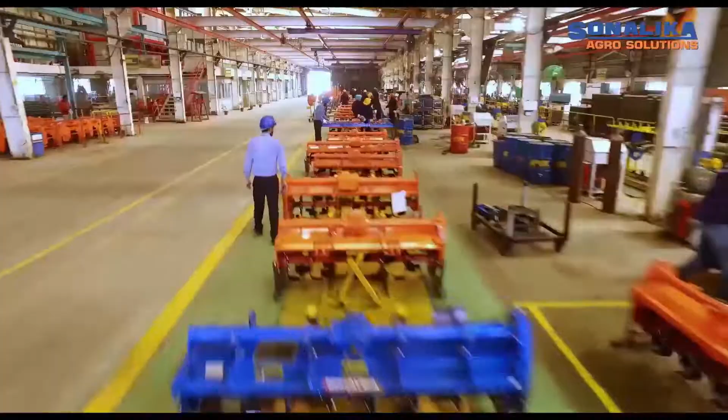With humble beginnings in 1969 as a manufacturer of farm equipment, Sonalika Group has grown into a leading international tractor manufacturing and farm mechanization company. Setting new benchmarks in quality, it is one of the fastest growing companies in the sector, with thorough focus on customer satisfaction and by aligning itself to the changing requirements of the farmers.

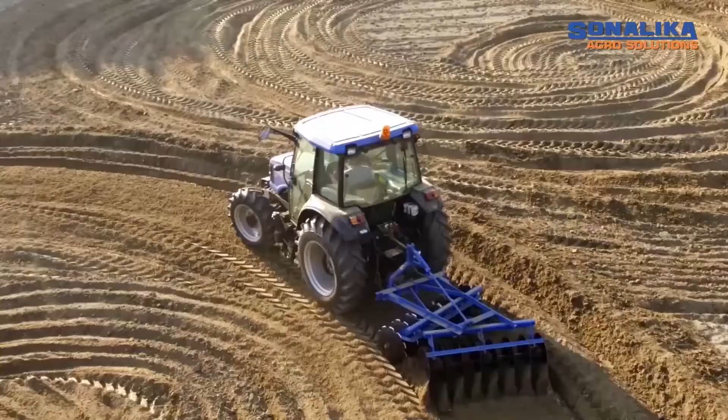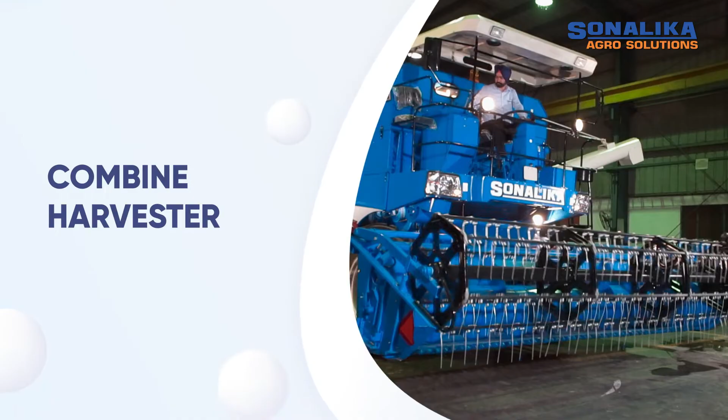Sonalika Group has always excelled in delivering high-quality, innovative products at competitive price. Staying true to its vision, Sonalika Agro Solutions proudly presents the Sonalika Harvester. In this installation video, we will share with you the process of installation and usage of the harvester and all that you need to know to get the best output from it.

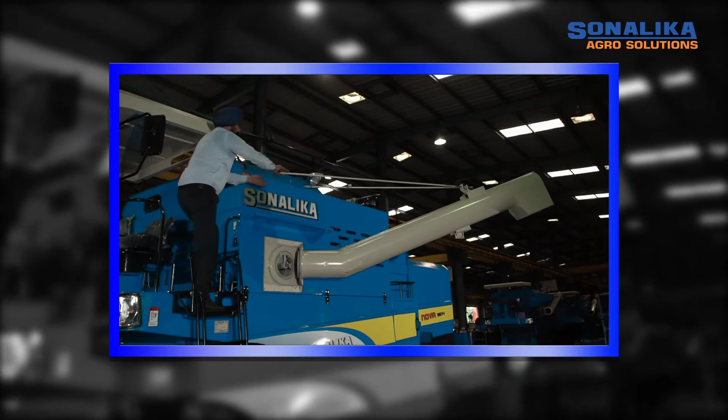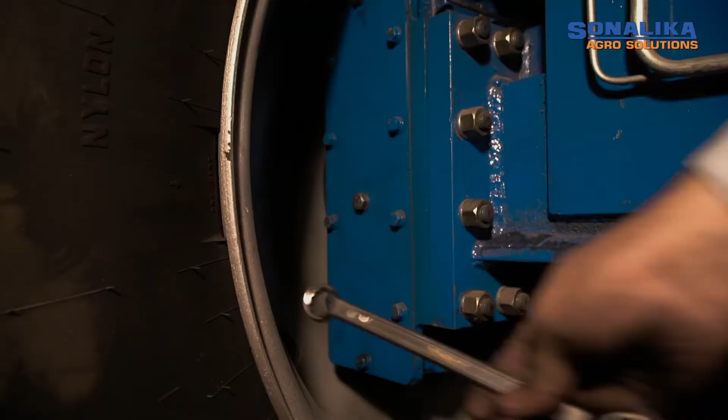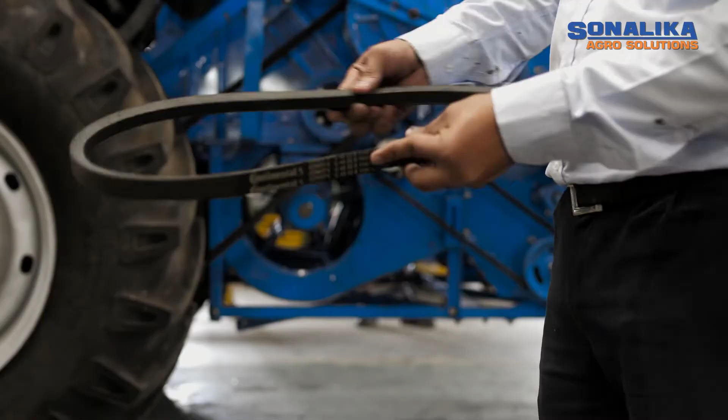Before operating the harvester, ensure and check following aspects. All nuts and bolts are properly tightened. V-belts need to be in proper tension. Adjust if required or replace if worn out. Before operating the harvester, all the bearings and greasing points should be greased every day.

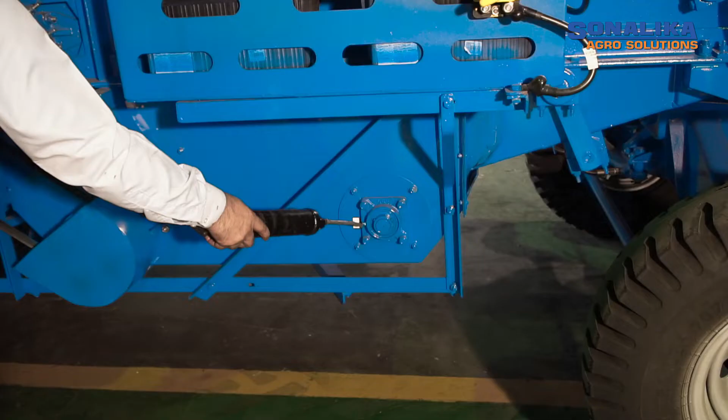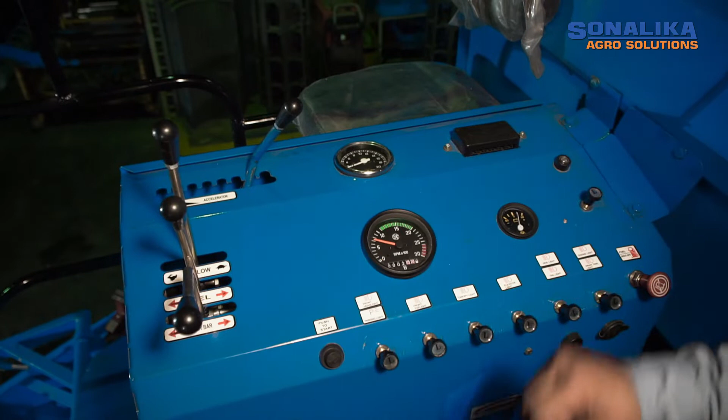Clean the radiator fins with the help of air or cloth, as a choked radiator will lead to overheating. Check the radiator coolant level and top up with clean water if required. Check the indication of ammeter for proper charging of battery. Check the transmission oil level of reductions unit, gearbox as per mark on dipstick and oil level hole.

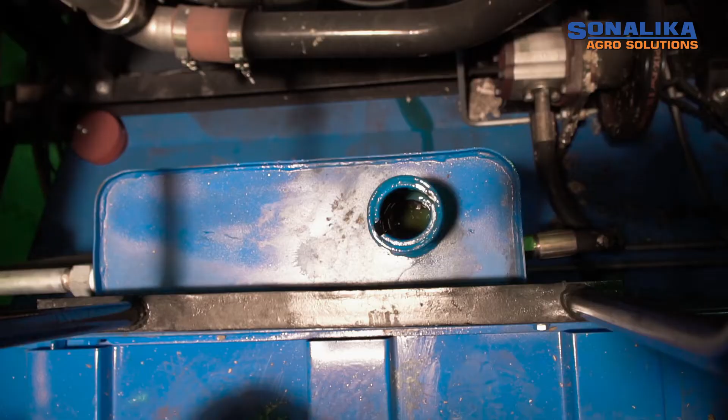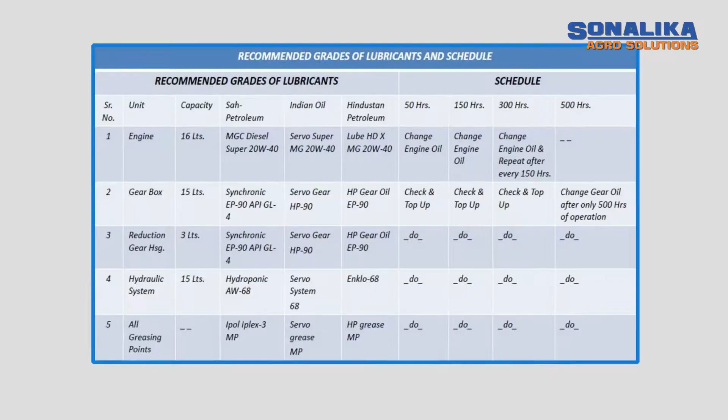Check the hydraulic oil AW68 level as per the level strip. Check the engine oil level as per mark on dipstick. Engine oil level must not go below the minimum mark. Top up with the recommended grade of oil if required. Clean the air cleaner with air after every 10 hours of operation.

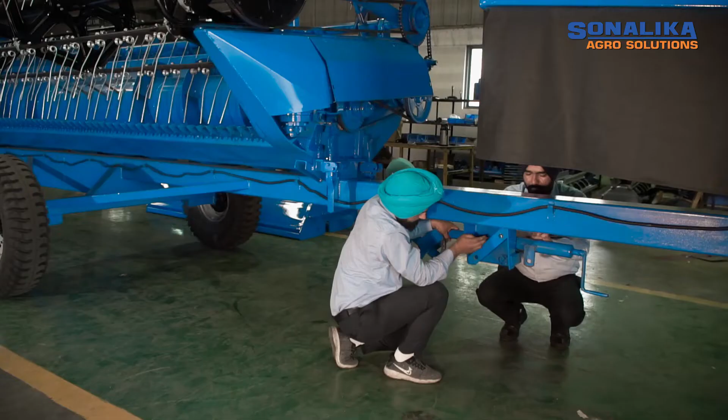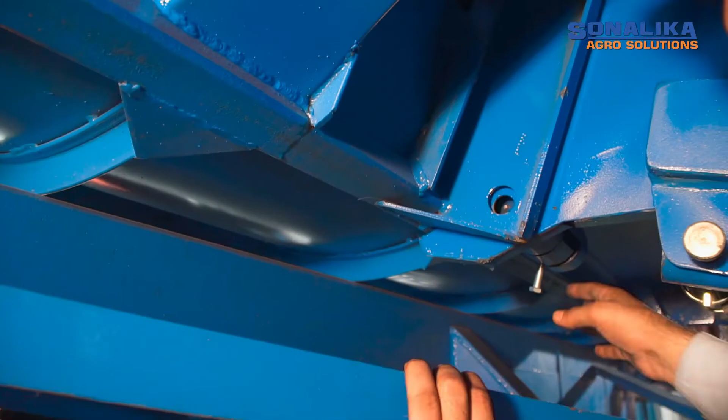Cutter bar mounting. Dismantle the cutter bar from the rear side and place it in front of the harvester. Align the harvester in line with the position of cutter bar. Move the harvester steadily to lock the cutter bar with harvester and lock it with the lock-in pin.

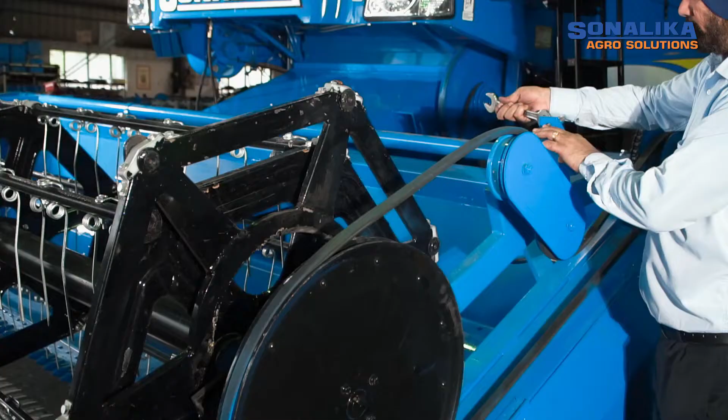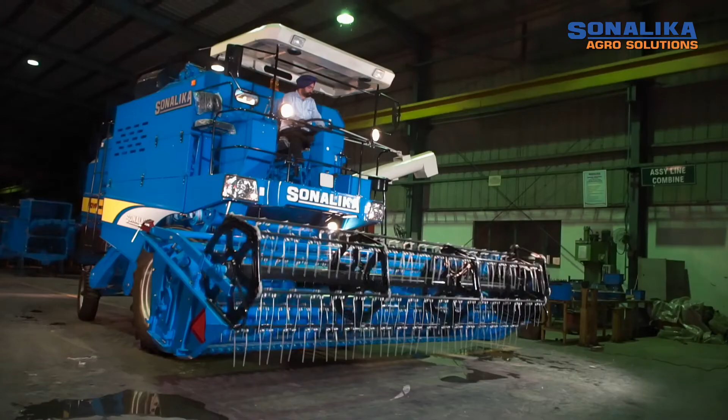Adjust all reel tines vertically facing to the ground for all standing crops and position the reel tines backward for badly lodged crops. The reel tine adjustment can be done by moving the cam roller mounting angle. Move the angle to the left for positioning reel tines backward and vice versa. Complete reel set can also be positioned forward or backward, up or down according to the crop requirement.

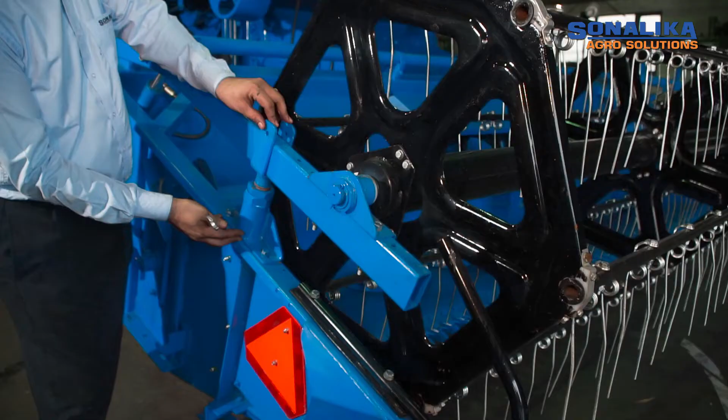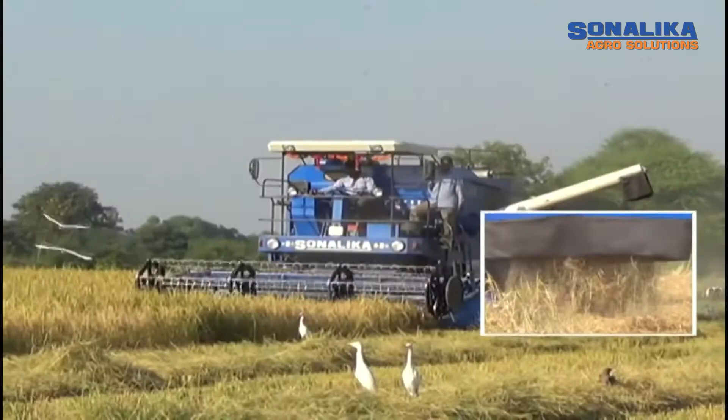Slacken the reel drive V-belt and unlock the bolt from either side of the reel. For badly lodged crops, move the reel forward, and for normal crops, the center of the reel should be vertical over the cutter bar.

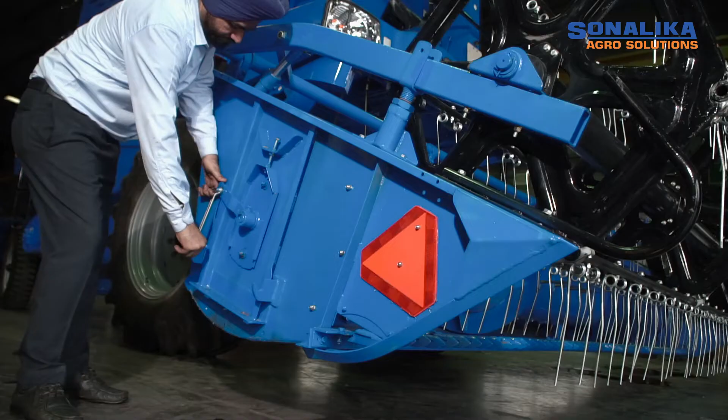Feeding of the crop to the feeder housing is important for the seamless working of the harvester. Maintain the gap between the front auger and the cutter bar tray 8 to 10 mm to avoid clogging of crops. Also adjust the prongs that help to bring the crop into the center of the feeder housing.

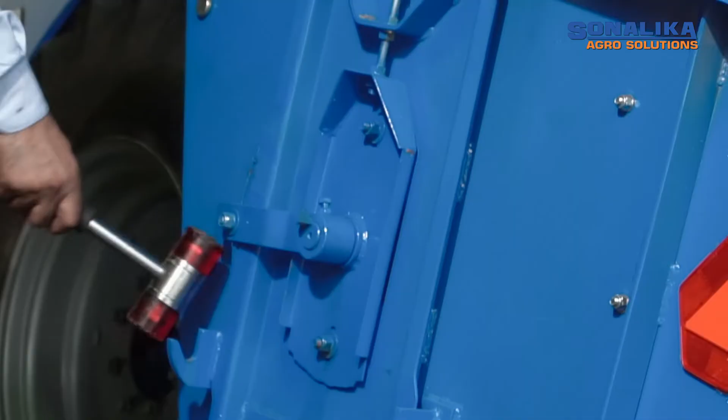Prongs can be adjusted by loosening the bolt and repositioning the lever. When harvesting bulky crops, move the lever downwards, and in case of short-strawed crops, move the lever upward. Position the lever in the center for harvesting normal crops.

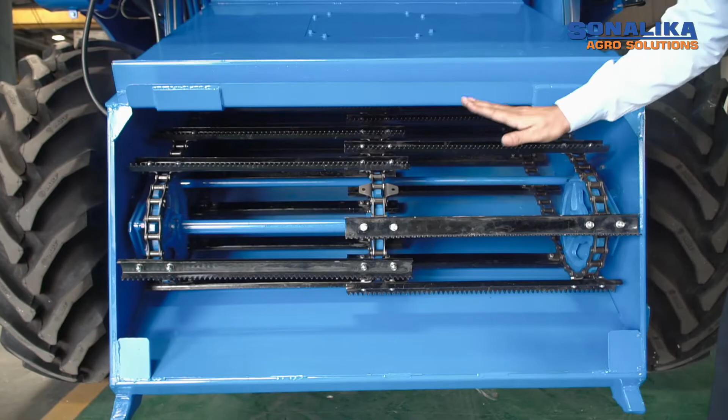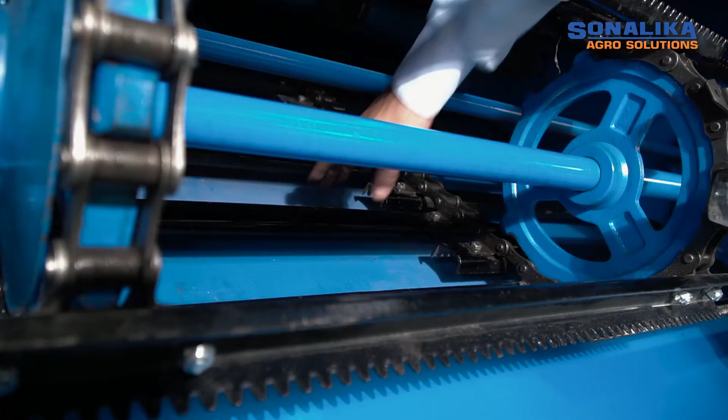Feeder chain adjustment. With continuous operation, the feeder chain gets slackened, which can hamper the feeding process unless corrective measures are taken. The feeder chain can be set to the right tension with the help of tensioner nut. Loosen the two nuts as shown in the video and tighten the tensioner nut. The chain must be evenly tensioned to avoid feeder angle touching the feeder housing floor.

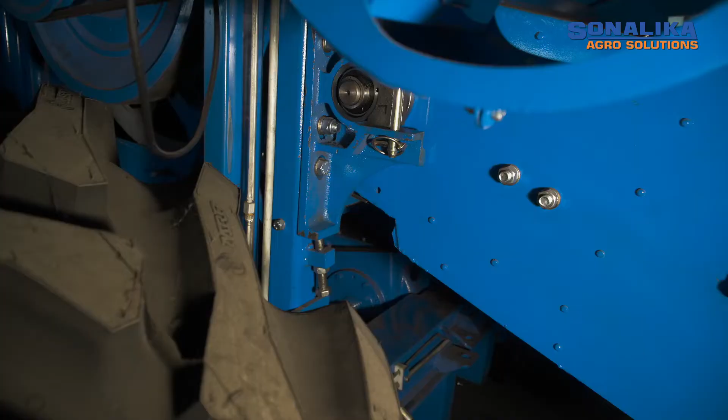Cutter bar leveling. Before putting the combine initially to work, check the cutter bar is in level with ground and adjust the cutter bar to be horizontal if necessary. The adjustment can be carried out with the help of holding bracket. Loosen the nuts as shown in the video and tighten the bolt given at the bottom to move the cutter bar upward, and loosen the nut to bring the cutter bar downward.

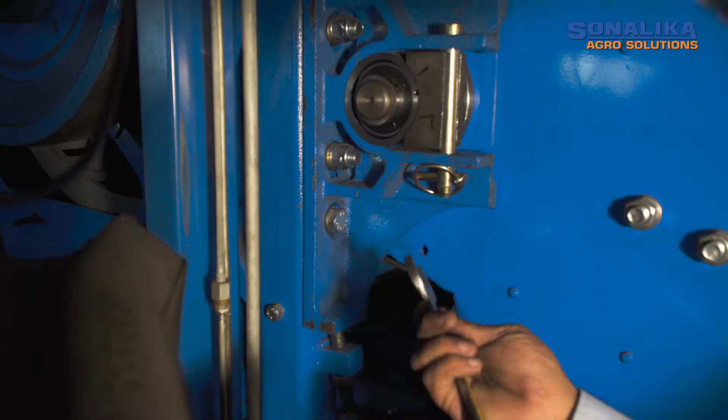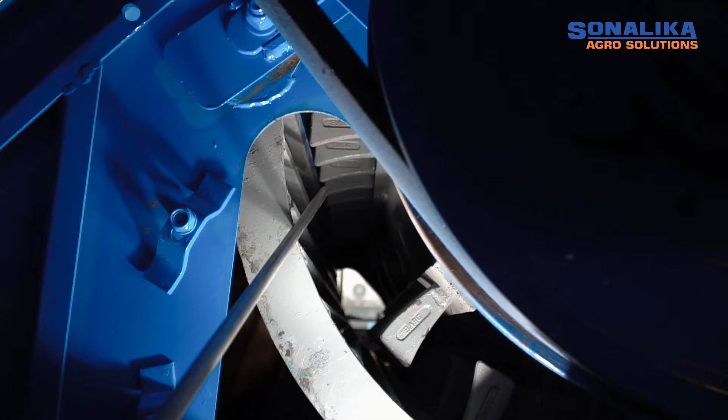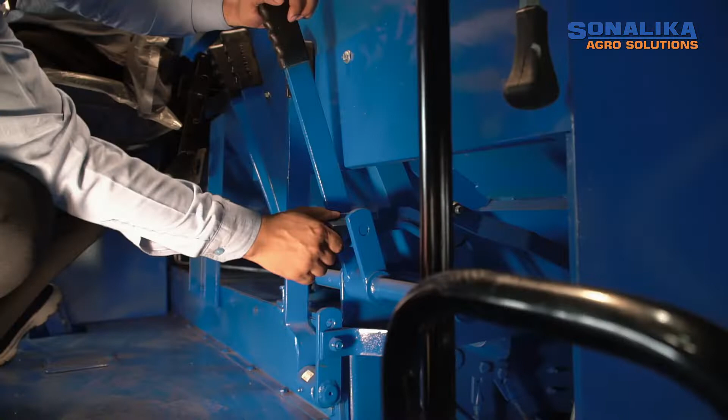Concave adjustment. Concave can be adjusted by means of shifting bolts in the holes provided at left and right of the concave. The maximum concave clearance is 5 mm to 37 mm. Adjust the concave according to crop type. The gap between the thresher and concave is set at the factory. However, the final adjustment must be made in the field to meet the actual condition of the crop.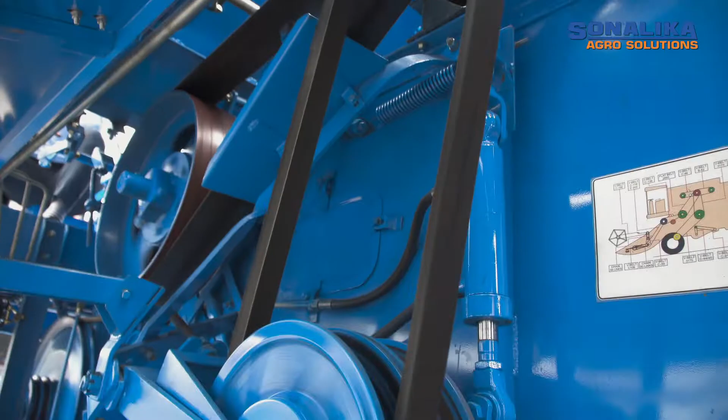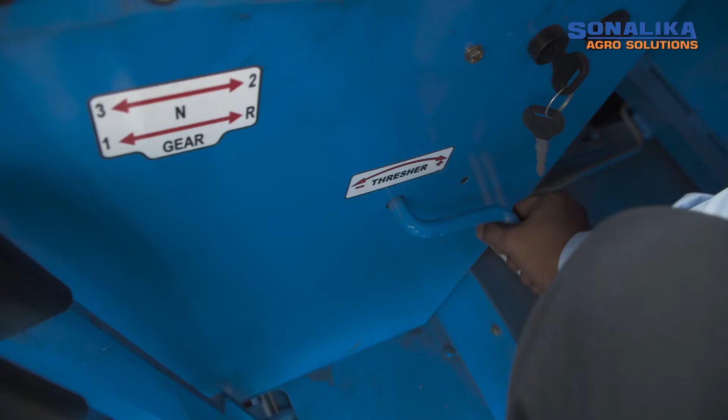Thresher drum speed. The drive to the threshing drum is obtained from the engine through guide drum. The speed of the drum is adjusted by variator control lever according to the crop and their threshing characteristics. Rotate the lever clockwise to increase and rotate it anti-clockwise to decrease thresher drum RPM. The thresher speed RPM ranges from 540 to 1050 RPM.

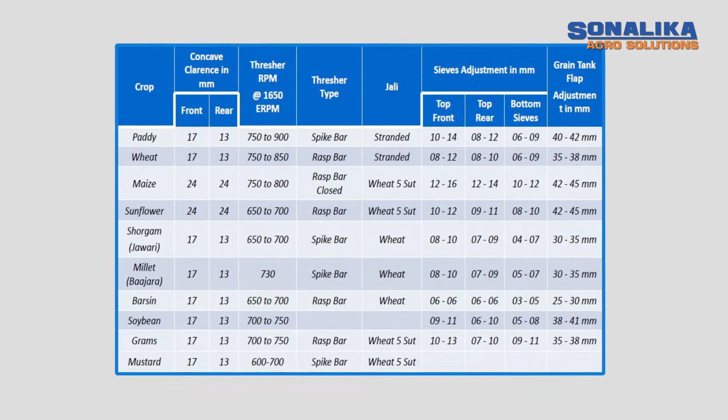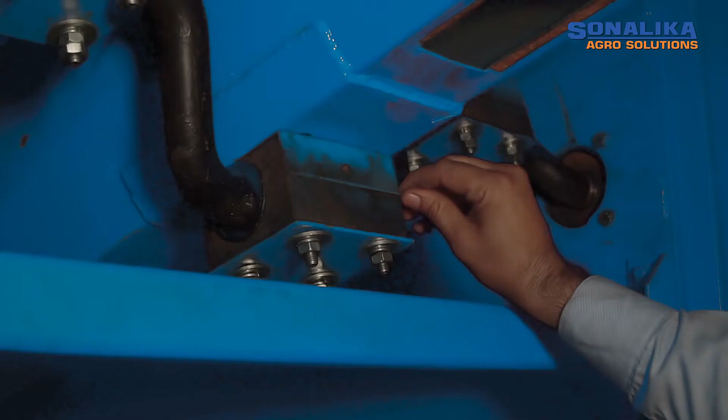Straw walker setting. Straw walker balancing is necessary for free movement of straws and grains. The straw walker should not have any upward or downward play, but the horizontal play should be maintained 1 mm to the right and left hand side. The upward and downward play can be balanced to the right tension by either inserting or removing shim between the wooden blocks present below the straw walker.

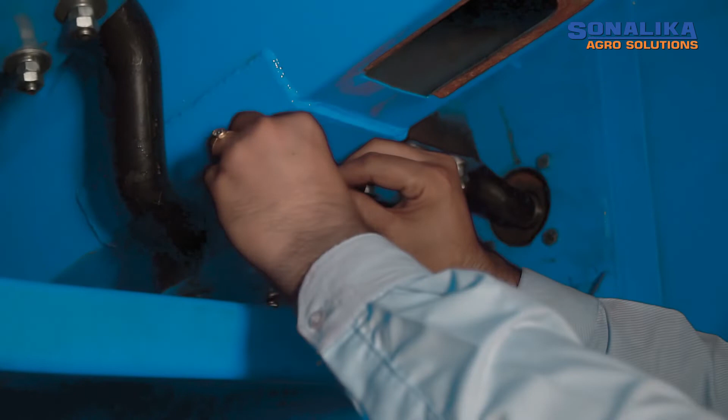If the play of the crank is on the higher side, remove the shim, and if it is too tight, insert the shim between the wooden block. It is important to note that the straw walker needs to be checked twice on every day of operation to ensure that it is not choked.

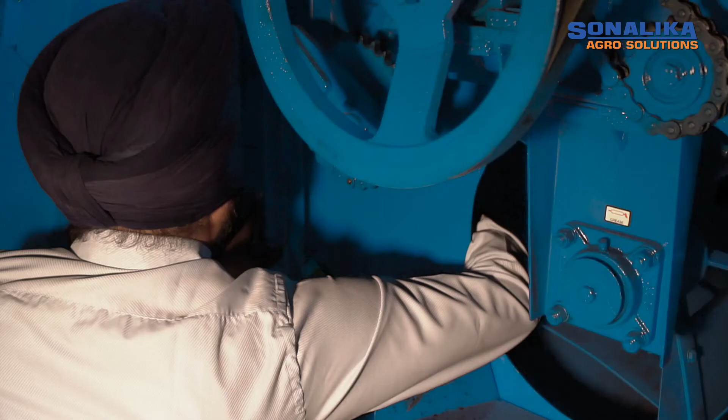Air adjustment. When air blast is excessive, it can be reduced by adjusting fan shutters to the aperture of the cleaning fan. The shutters can be opened or closed by means of nuts as required, depending upon the crop condition. Excessive wind can throw grains out and slow wind can hamper grain cleaning.

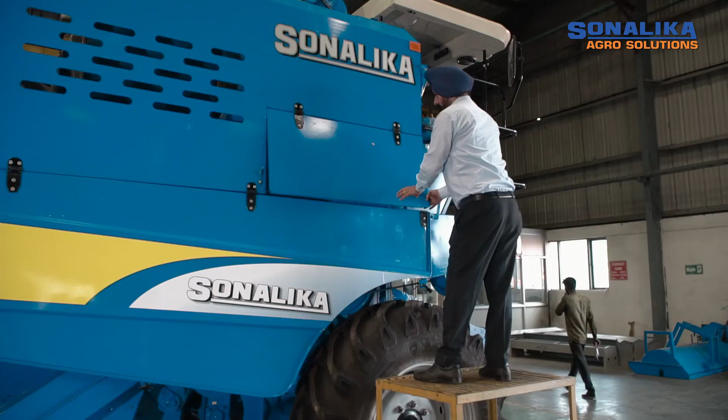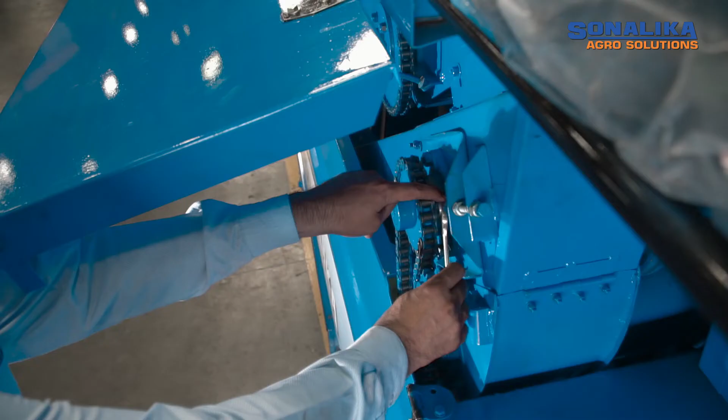Elevator chain adjustment. Elevator chain carries the grains to the grain tank, and overtension of this chain causes premature wear to chains and sprockets. To adjust the tension of elevator chain, loosen the clamping bolts on both sides of the elevator and the lock nut of the adjustment screw.

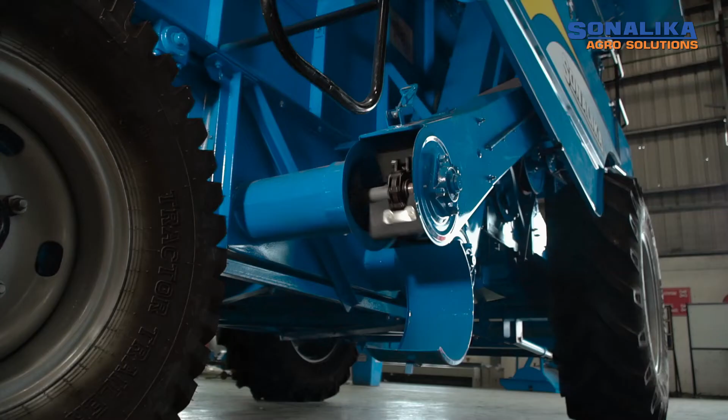Increase tension of the elevator chain by tightening the nut. Also tension the filler auger drive chain with idler sprocket. Tension the elevator chain to such an extent as to prevent the rubber paddles from rubbing the elevator's housings.

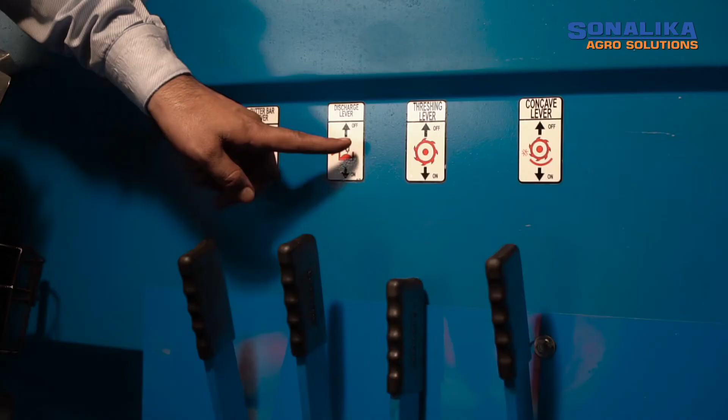Unloading of discharge tube. The grain tank unloading tube is engaged by pulling the rod on the grain tank. Swing the tube to unloading position for transport. The grains are discharged by means of discharge auger through the discharge tube.

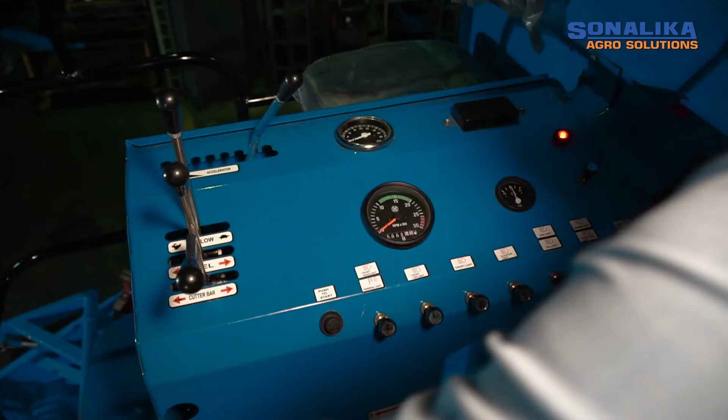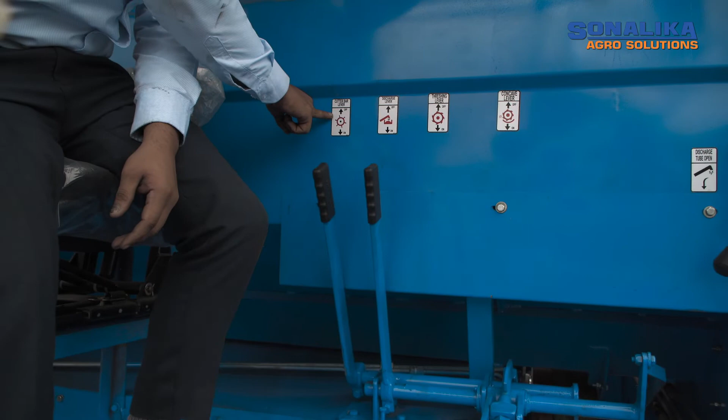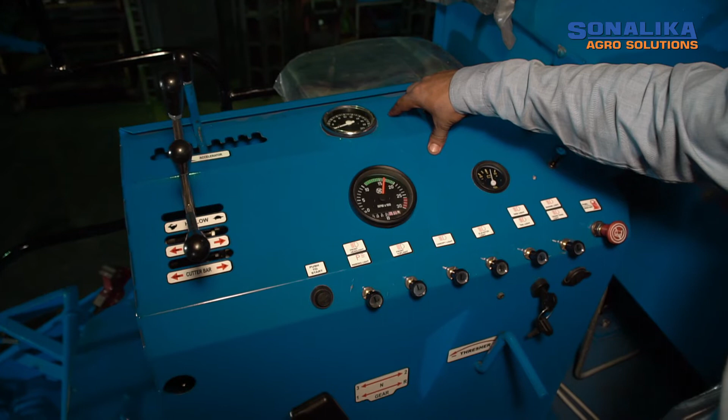Switch on the ignition and engage threshing lever and cutter bar lever to activate their mechanism. The levers can be engaged by pressing the levers downward, and the levers can be disengaged by pulling them upwards. Bring the harvester to motion slowly and set the engine RPM to 1650 for a smooth harvesting process. Now the combine harvester is ready for harvesting.

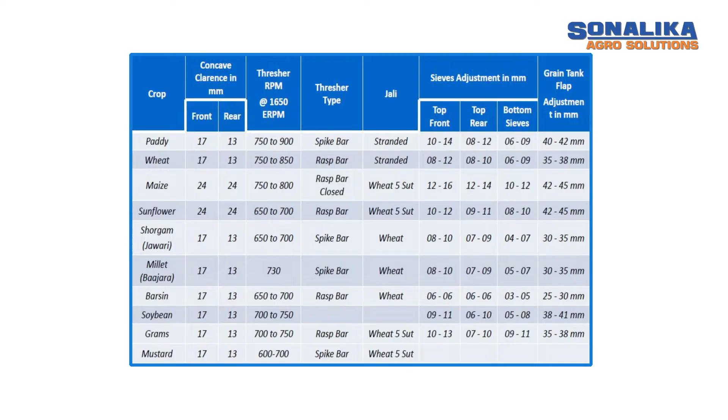Ensure there is no unwarranted noise while harvesting and the grains are properly poured into the grain tank. Also check if there is any grain loss or improper cleaning of the grain. If found, set the thresher mechanism according to the crop as per the table shown before.

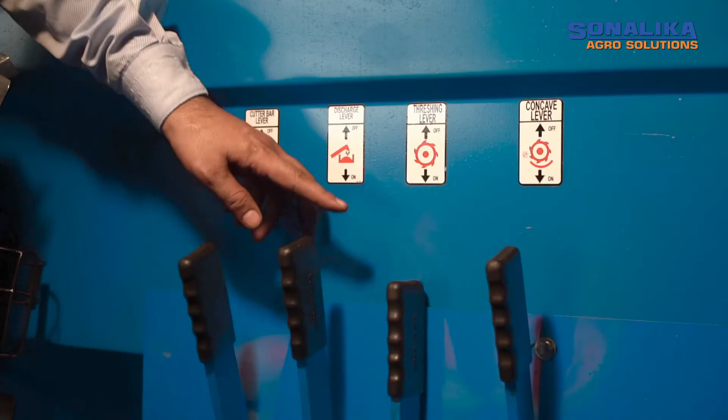Intermittently check the tank volume through observation glass. Once the grain tank is full, engage the tank unloading lever by pushing them down. Once the grain is transferred to the tractor trolley, pull up the lever to disengage.